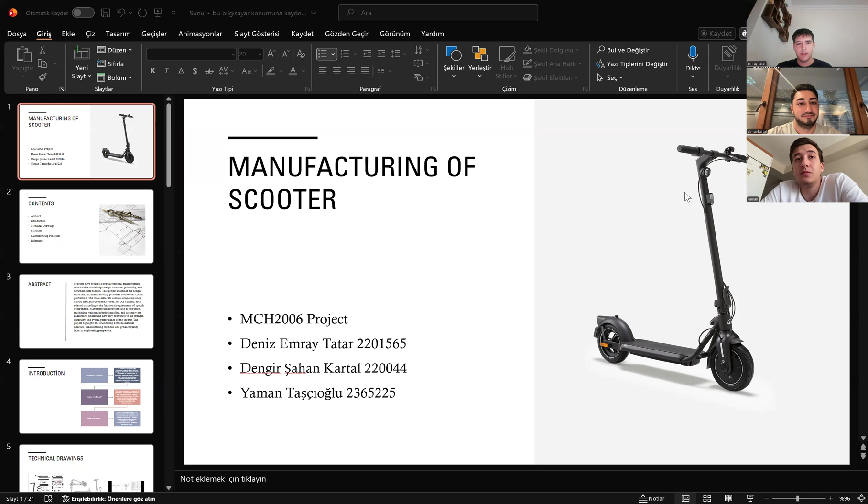Hi, my name is Emray Tatar, and I got two of my friends. One is Dengir, one is Yaman. We're gonna present you how we manufacture a scooter right now.

First, I would like to start with the abstract of our project. Scooters have become one of the most popular personal transportation vehicles in recent years. They are lightweight, portable, and environmentally friendly. In this project, we examined how a scooter is designed, which materials are used in its production, and which manufacturing processes are required to produce it. We also analyzed how material selection affects the durability, strength, and overall performance of the scooter.

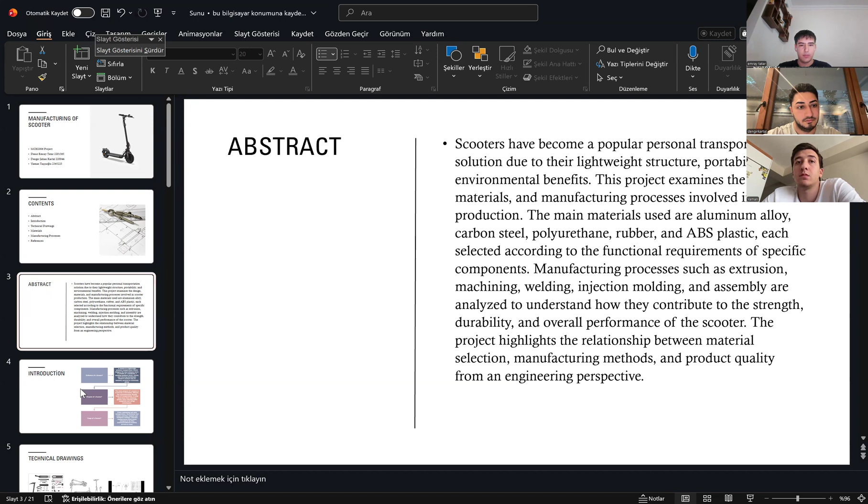Now we're moving on to the introduction part. As cities become more crowded, people need faster and more practical transportation methods. Scooters provide an efficient solution for short distance travel. They are easy to carry, require little storage space, and can be used by people of different age groups. Because of these advantages, scooters are widely used in urban areas, campuses, and recreational activities. Next, I want to show you the technical drawings.

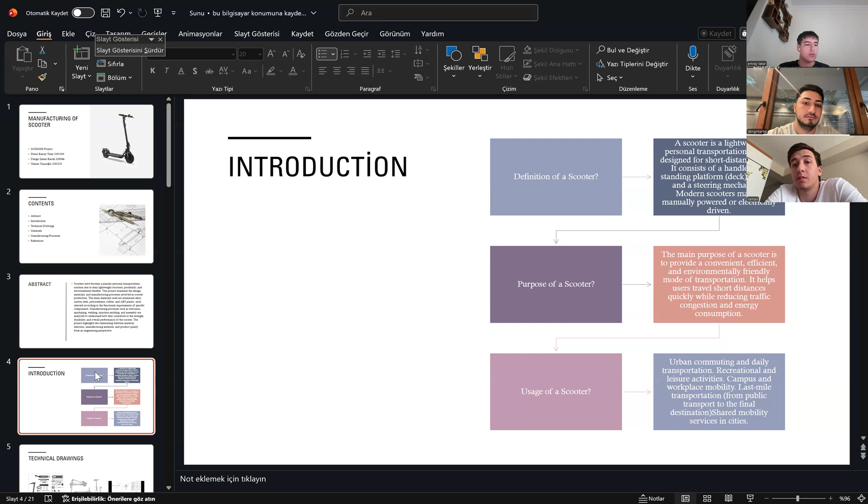Next, let us define what a scooter is as we go back to the introduction. A scooter is a lightweight vehicle that consists of a handlebar, a standing platform called a deck, wheels, and a steering mechanism. The rider stands on the deck and controls the direction using the handlebar. Some scooters are manually powered while others use electric motors. In our project, we focused mainly on the structure and manufacturing aspects of a modern scooter.

The purpose of a scooter is to provide a convenient and efficient transportation option. Scooters help users travel short distances quickly while reducing traffic congestion. Compared with cars, they consume much less energy and have a smaller environmental impact. They are especially useful in crowded urban environments where traditional transportation methods may be slower or less practical.

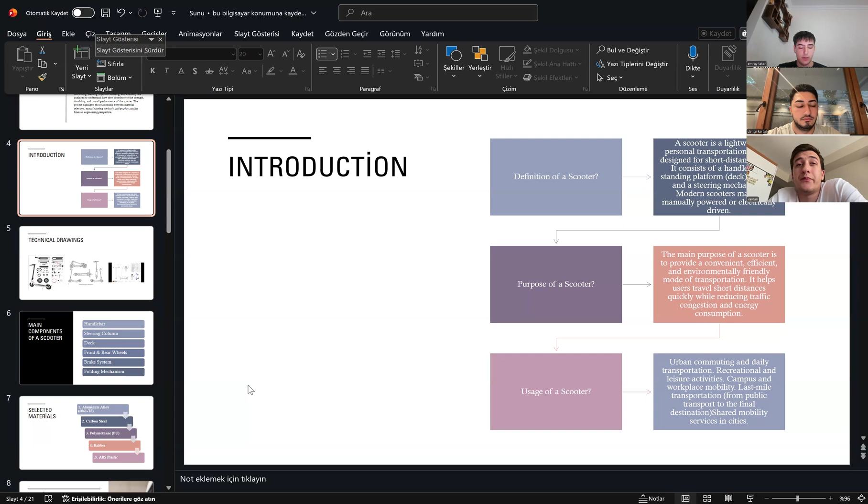Now, let's talk about the usage of scooters. Scooters are commonly used for urban commuting and daily transportation. Many students use them to move around campus, while workers use them to travel between public transportation stations and their final destinations. This is known as last mile transportation. In addition, scooters are often used for leisure and recreational purposes. Shared scooter services are also becoming increasingly common in many cities around the world. This is the technical drawings again.

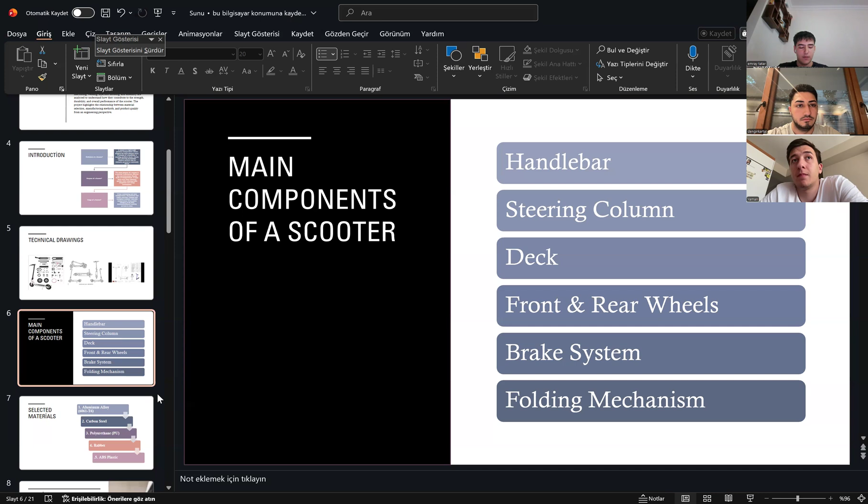Fine. The first component is the handlebar, which allows the rider to control direction. The steering column connects the handlebar to the front wheel and transfers steering movement. The deck is the platform where the rider stands. The front and rear wheels provide mobility and stability. The brake system ensures safety by allowing the rider to slow down or stop. Lastly, the folding mechanism makes the scooter portable and easier to store or carry. These components work together to create a safe, lightweight, and efficient transportation vehicle. Now, Dengir will continue with selected materials.

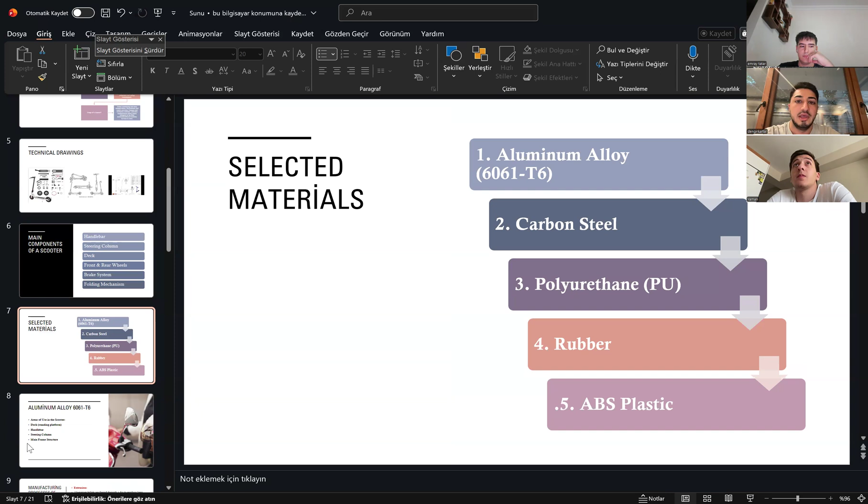Now I will talk about the materials we selected for the scooter. When choosing materials, we considered three criteria: strength, weight, and cost. We used five main materials: aluminum alloy 6061-T6, carbon steel, polyurethane, rubber, and ABS plastic. Each one was selected based on the requirements of the component it is used for. Let me explain them one by one.

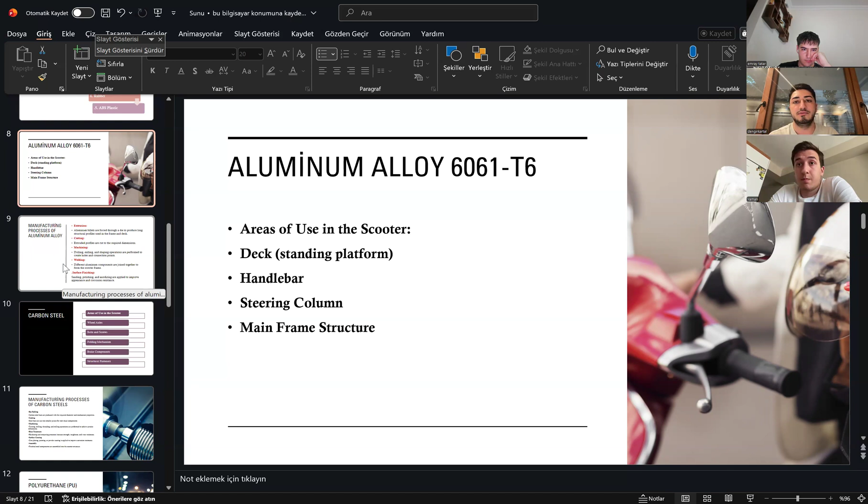The first material is aluminum alloy 6061-T6, the main structural material of the scooter. It is used in the deck, the handlebar, the steering column, and the main frame. We chose aluminum mainly for its excellent strength to weight ratio. It is much lighter than steel, but still strong enough to carry the rider safely. It also forms a natural oxide layer, so it doesn't rust. Very important for outdoor use, and it's easy to extrude, machine, and weld.

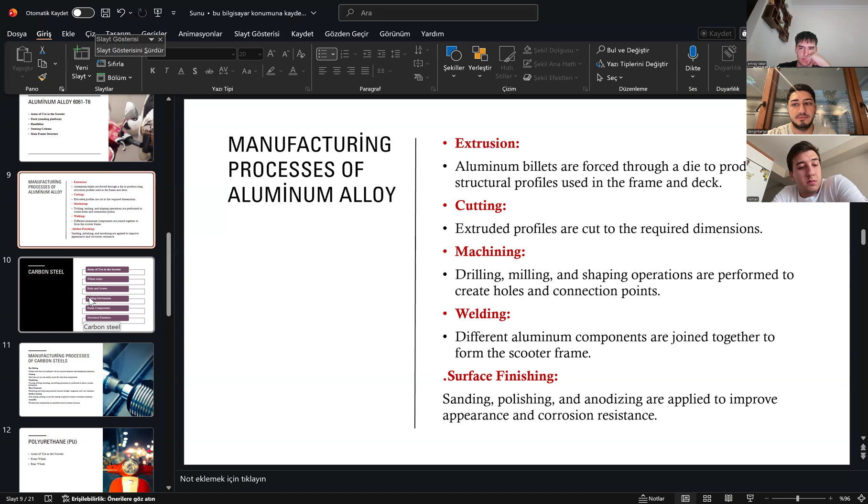The aluminum parts are produced in 5 steps. First, extrusion. Aluminum billets are forced through a die to create long profiles for the frame and deck. Second, these profiles are cut to size. Third, machining: drilling and milling create the holes and connection points. Fourth, the components are welded together to form the frame. And finally, surface finishing: sanding, polishing, and anodizing, which thickens the oxide layer and improves both appearance and corrosion resistance.

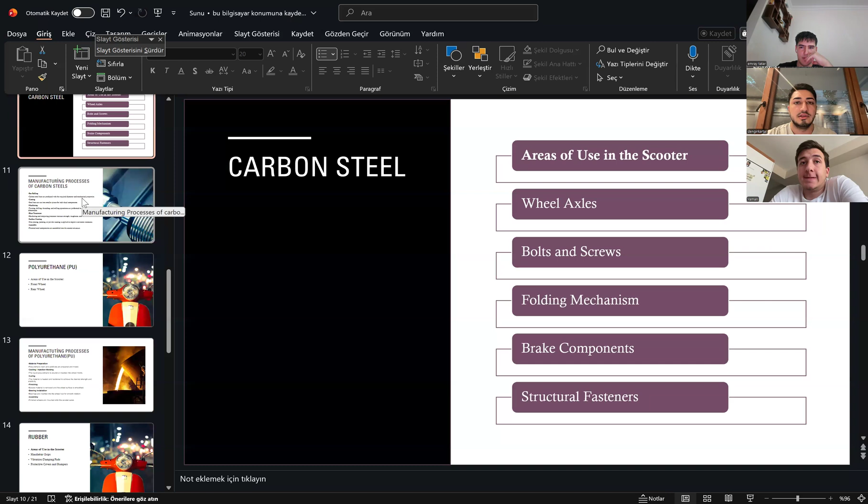The second material is carbon steel. While aluminum forms the main body, carbon steel is used in the highly loaded parts: wheel axles, bolts, screws, the folding mechanism, and the brakes. These parts face the highest forces and constant friction, and carbon steel provides high strength, wear resistance, and load-bearing capacity. It's also very cheap, which makes it ideal for mass-produced small parts like bolts.

Carbon steel parts are produced in 6 steps. It starts with bar rolling, producing steel bars with the required diameter. The bars are then cut into pieces and machined: turning, drilling, and threading for the bolts. The fourth step, heat treatment, is critical.

Hardening and tempering greatly increase strength and wear resistance. Then a surface coating like zinc plating is applied, because unlike aluminum, steels rust easily. Finally, the parts are assembled into the scooter.

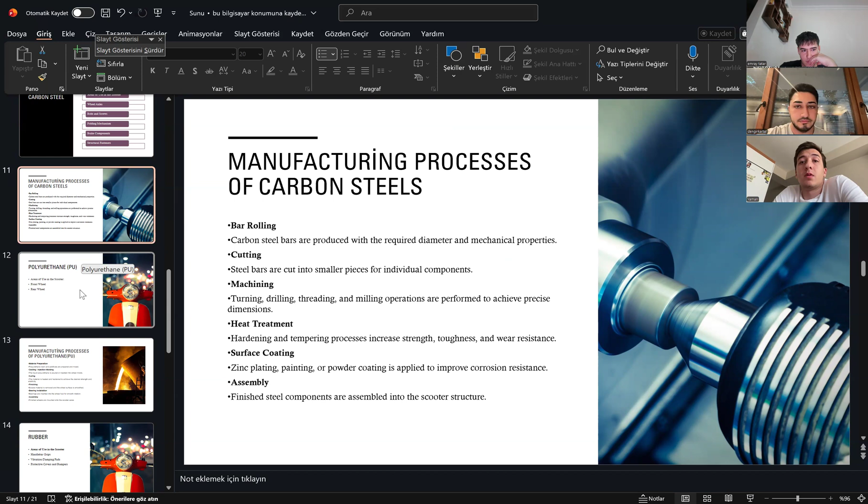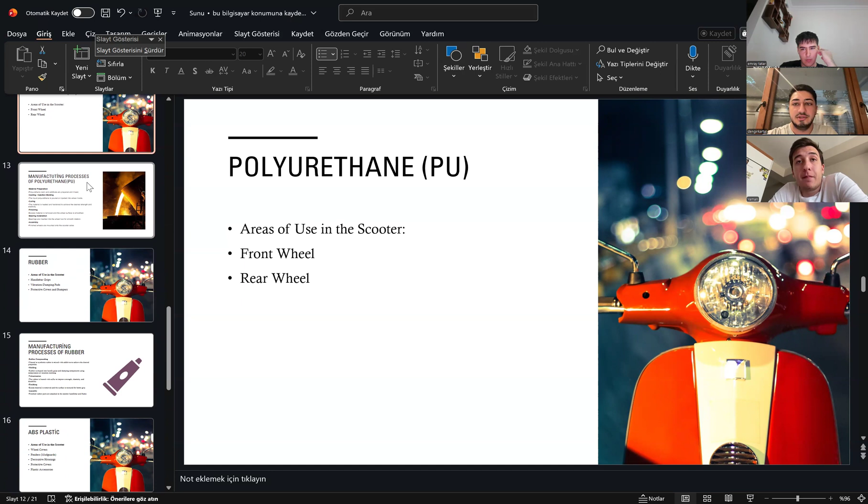The third material is polyurethane, used for the front and rear wheels. PU is perfect for wheels because it combines 3 properties. High wear resistance, so the wheels last long. Shock absorption, which makes the ride comfortable, and good traction: strong grip on the road for safety. It's also much quieter than harder materials while rolling.

The wheels are produced in 6 steps. First, the polyurethane resin and additives are mixed. Then the liquid PU is poured or injected into wheel molds. The third step is curing. The material is heated and hardened, which gives the wheels their final strength and elasticity. After finishing the surface, bearings are installed into the hub for smooth rotation. Finally, the wheels are mounted onto the carbon steel axles.

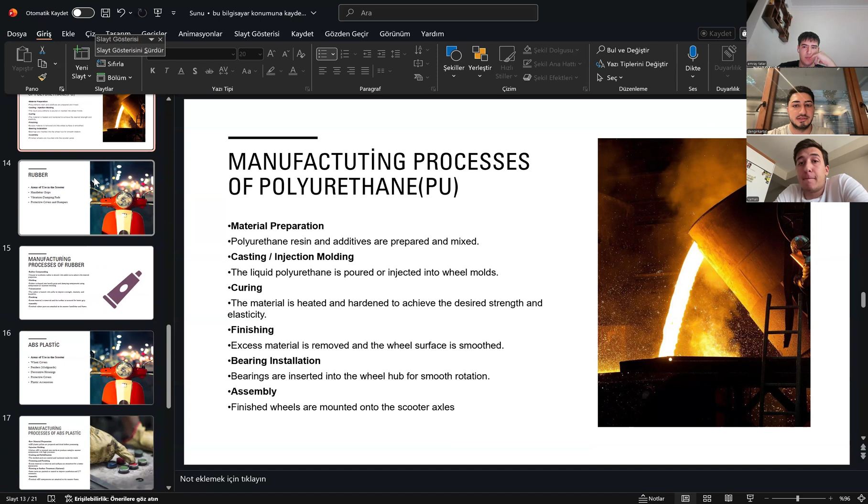The last material in my part is rubber, used in the parts that touch the rider: handlebar grips, vibration damping pads, and protective covers. Rubber gives a soft, comfortable grip and has a high coefficient of friction, so the hands don't slip even in wet conditions. Its elasticity also absorbs road vibrations, reducing fatigue, and it keeps these properties in all weather conditions.

That concludes my part. Now Yaman will continue with ABS plastic.

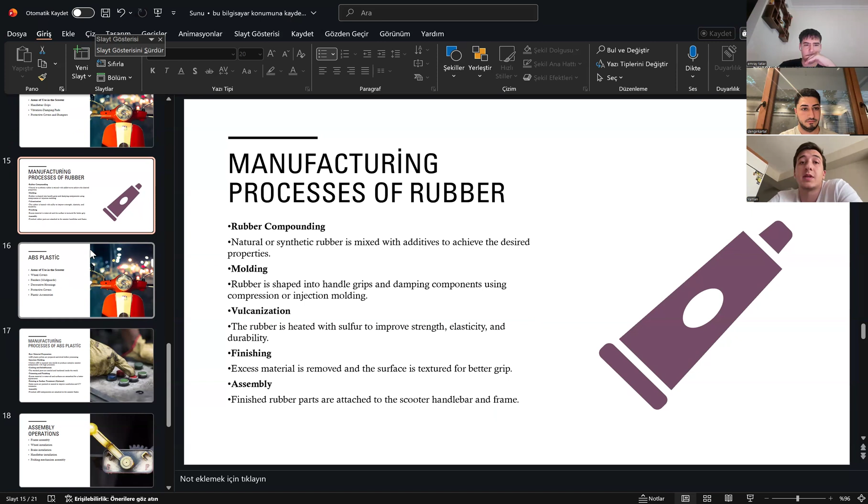I will be presenting the final stage of our scooter manufacturing process, which includes plastic component production, final assembly, surface finishing, and quality control. Looking at slide 16, we selected ABS plastic for specific non-structural parts. Why ABS? Because it offers an excellent balance of lightweight properties and high impact resistance, making it perfect for components prone to collision, such as wheel covers and fenders.

On slide 17, you can see the production workflow. We start by drying the raw ABS pellets to remove moisture, followed by high precision injection molding. This process allows us to manufacture complex geometries quickly and efficiently for mass production.

On slide 18, this is where all our individual components come together: the assembly operation. In this phase, the aluminum frames, steel structural parts, and ABS plastic components are integrated. The process begins with the sub-assembly of the main chassis, followed by installing the wheels, motor, and braking system.

The assembly of the handlebar and folding mechanism is particularly critical as it directly impacts user safety and portability. Ensuring every bolt is tightened to exact torque specification is vital for the vehicle's structural integrity and product lifespan.